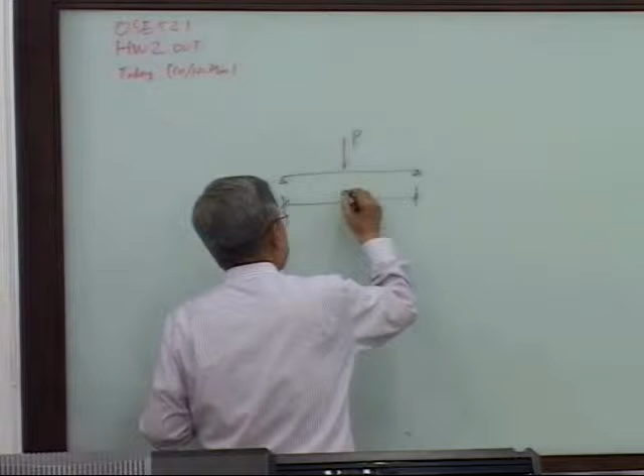This homework problem: this is a simple beam, and you have a loading P. And this is 5 meters. And of course, the maximum bending moment occurs right at the middle. What's the bending moment?

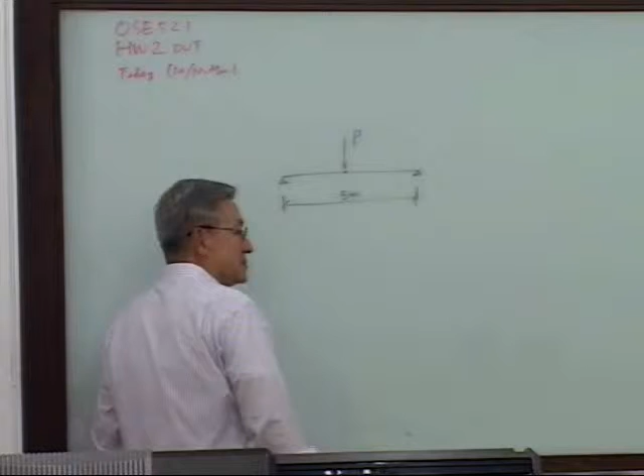Expressed as P, what's the bending moment expressed as P? In the middle — well, let's say this is L. Bending moment, let's say. So over here, the reaction force — this is high school mechanics — is P over 2. The bending moment right here is half of P multiplied by half of L, right? So the critical bending moment is PL over 4.

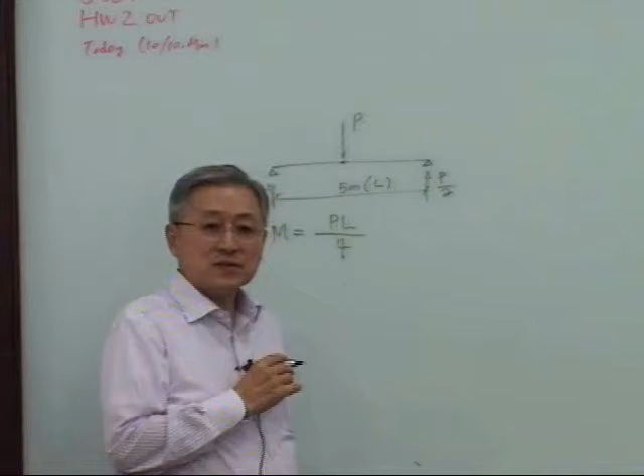I'm going to call this the resistance — doesn't matter, I'm going to call this as resistance. I'm sorry, not resistance. The S. We use R and S, okay?

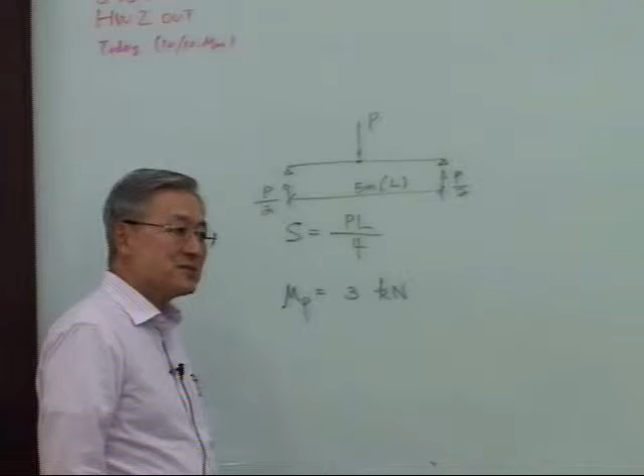Then now, to make a probabilistic model, I have to think about P as a random variable. So as you see in the homework, for the random variable, mu P is equal to 3 kilonewtons. What's mu P? Who cares, Monday morning — mu P is the mean value of the loading, okay? And sigma P is the standard deviation, the spread of the loading. If it's deterministic, it's just one point, one constant. Sigma P squared is equal to 1 kilonewton squared, so this is going to be the variance of the loading.

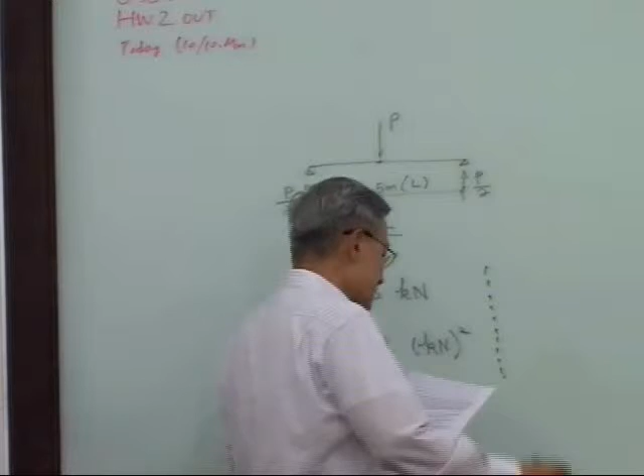And so now I have to give a strength for the beam. So I'm going to say that the mean strength of the beam is 10 kilonewton meters. So this is force times length, that's a moment. So I'm giving it to you as a moment to make it easy — not the full design problem, but a partial design problem — to check out how to handle the actual problem.

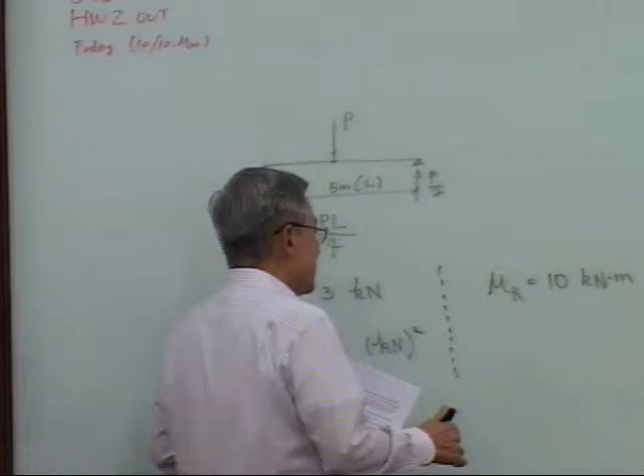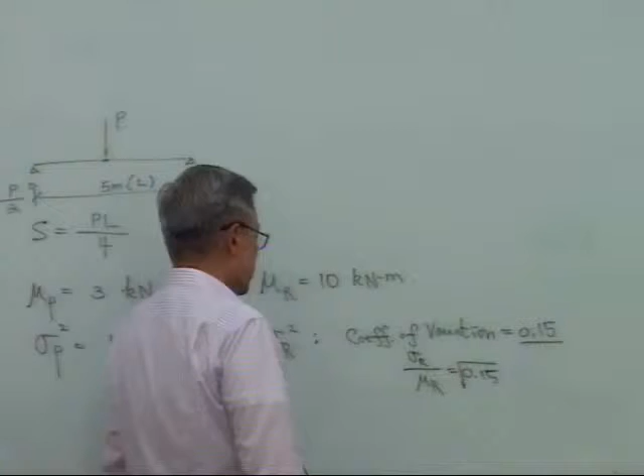Instead, I can give you sigma r squared, but here I'll give a CV, coefficient of variation, equal to 0.15. This is usual input, or from a vendor's sheet, you could have this as part of the spec. Coefficient of variation equals sigma r over mu r, so that's what it is. Then you can compute the sigma r.

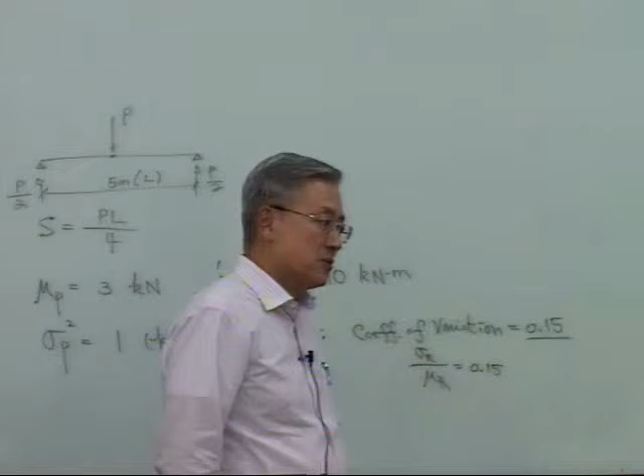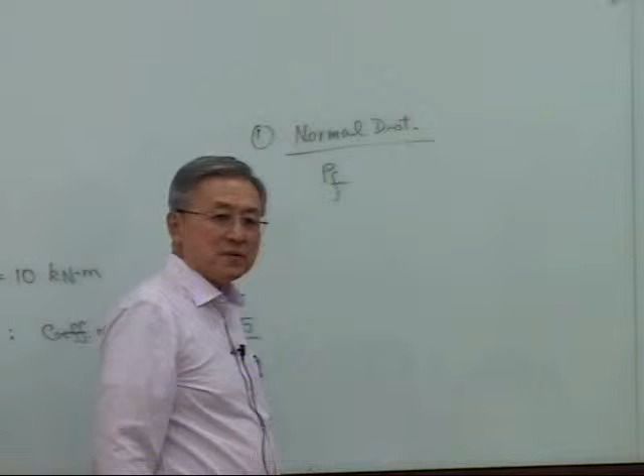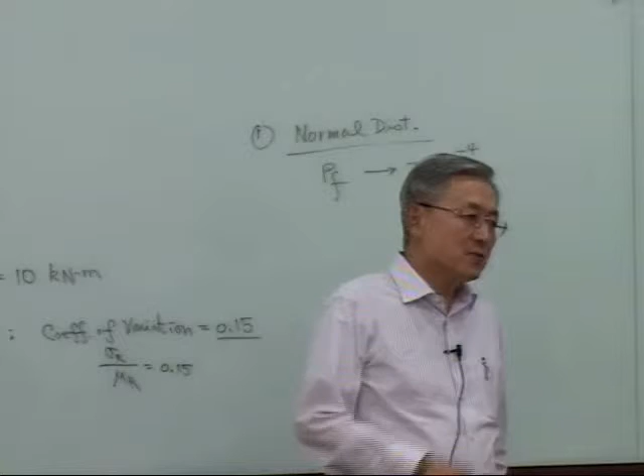Assume normal distribution for loading and the strength, bending strength. First problem, both are normal distribution, very standard. From there, I ask you to compute the PF. The answer is 7 times 10 to the minus 4. Instructor is so generous, because my purpose is not just to see. You will do it 100%, you will compute this correctly. But if at the beginning you write the wrong answer, then you can't proceed to the next step.

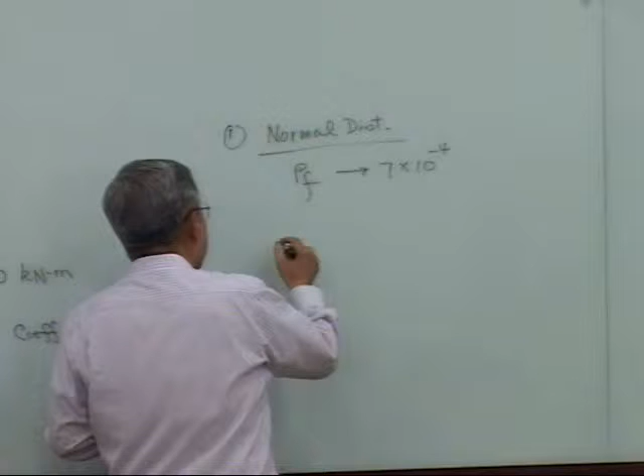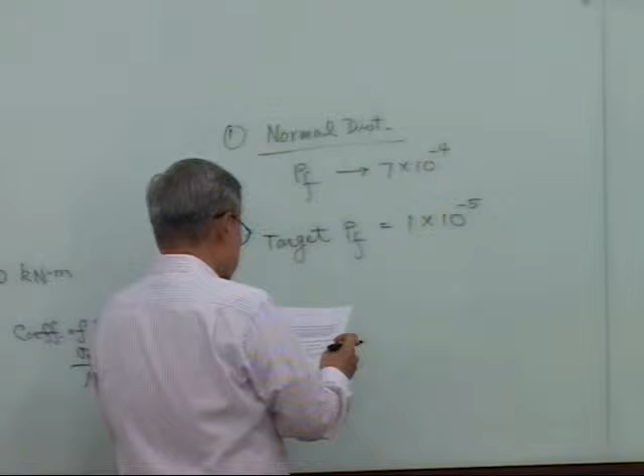So I really want you to prove the probability of failure of the system is 7 times 10 to the minus 4th. Confirm that. Normal distribution, that's what happened for most products. Then the question is, as you compute, you have that, but your target PF, or design PF, is not this, it is 1 times 10 to the minus 5th. Then now, in your position, what are you going to do? How can the simple design be changed so it can meet the target probability of failure? Very simple probabilistic design concept. Clear, right? Question clear?

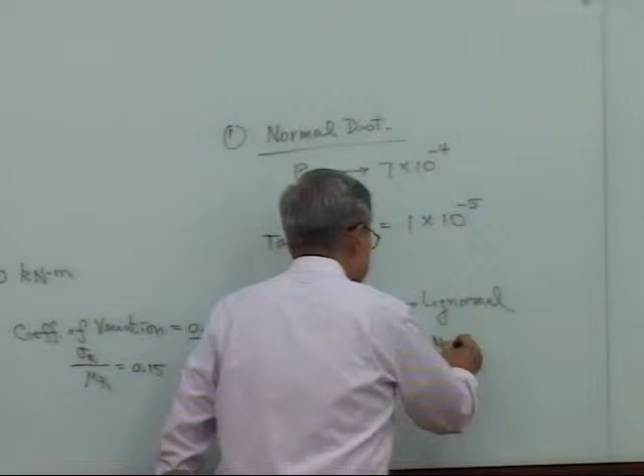Not both. Second problem: loading is concerned with log normal distribution, and resistance, bending strength, is normal. Do we have a question? Loading is log normal, and the strength, bending strength, is a normal distribution. Then what's the PF?

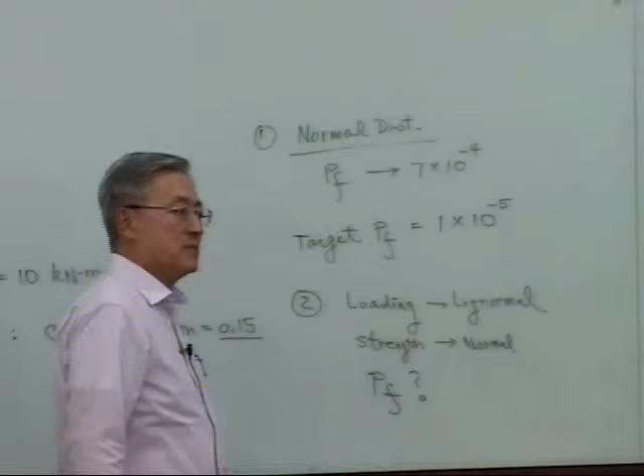Jinggyun, question? We had some question about problem number 1. Okay, go ahead. If we calculate the PF, we can get 7.5 times 10 to the minus 4. You have to confirm. I gave you the value, it could be wrong, but that's what I expect: 7 times 10 to the minus 4th power. So we have to reduce the PF, right? You have to reduce the PF. Then what do you want to do? 10 to the minus 5. Yeah, that's the target probability of failure. Then actually when you compute that, that's 7 times 10 to the minus 4.

Usual criteria is all around there, but I want to make sure the probability of survival is higher. So I can make the target probability of failure 10 to the minus 6 or 7. Then what do you have to do? Starting from today, or possibly Wednesday, I start to inject the safety factor. Then how do you relate the safety factor with the reliability or failure probability? That's the whole idea. This is interesting. I gave some thought last night, then I said, let's do it, okay?

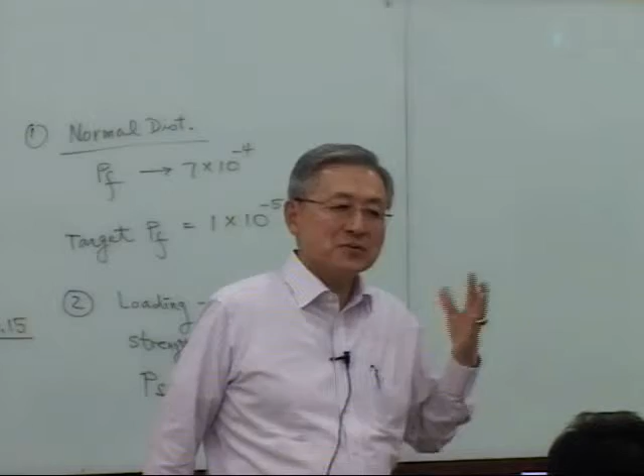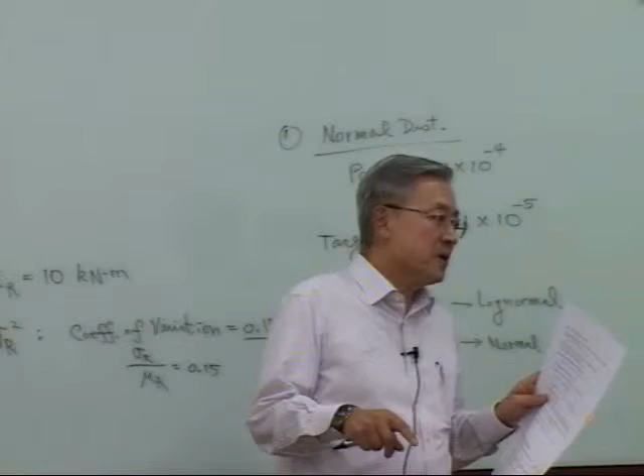Some corrections we're going to make, because last Friday I confused a little bit between the exponential probabilistic model for time to failure and the Weibull model for time to failure. But if you look at your handout, your handout was okay, right? All the notations I used a math type, so-called. Then I'm pretty sure I converted it to a PDF file, and you got the PDF file. So if you look at page 5-2, you will see the Weibull distribution there. If you look at the Weibull distribution, I picked up the best features from a few different books and some papers, and they use different notation, and that's what caused a little bit of confusion on notation.

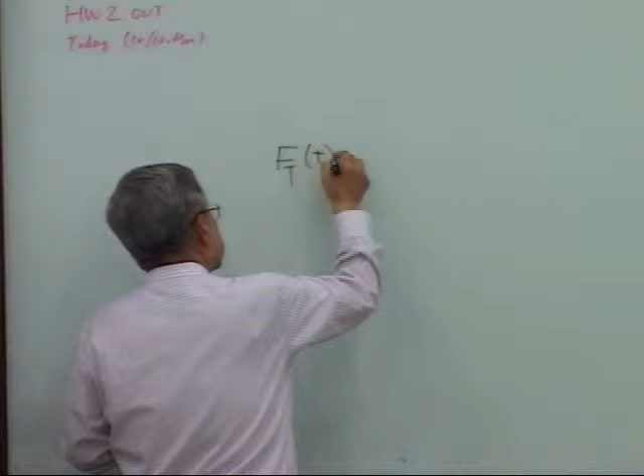If you look at the Weibull distribution, FT in page 2, there is something like this: 1 minus exp of minus t over beta, to the alpha power, and of course t is greater than or equal to 0. That's what you will see there. Two parameters involved, alpha and beta. This is page 2.

And of course, for the reliability is concerned, which is 1 minus F(t). Because this really means this is a probability distribution model or cumulative distribution model. This is equivalent to saying t is less than or equal to t, then reliability is concerned is a complement to this, which is 1 minus f(t).

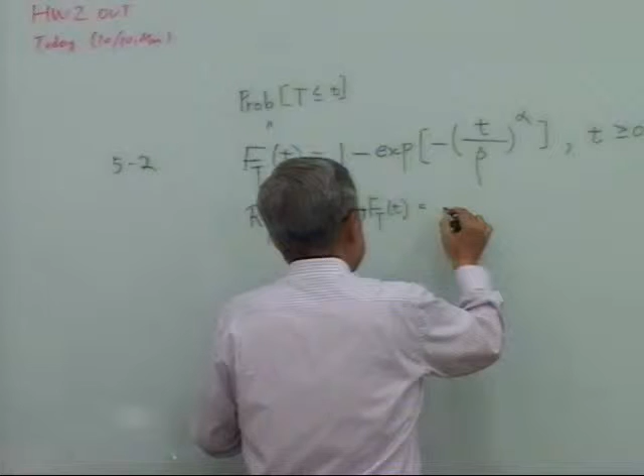So you have reliability model is concerned as minus t over beta, to the alpha. This is what is said exactly there. This is correct. There's nothing wrong on this one.

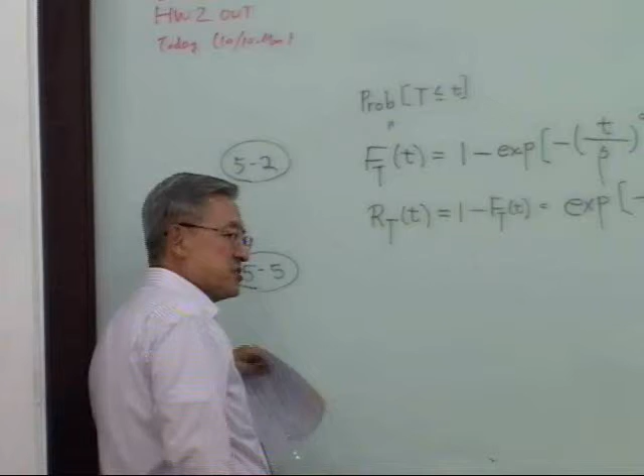This is all correct. But if you look on page 5-5, okay, this is one point of confusion from Friday. Page 5-5, this 5 is really nothing to do with chapter 5, or if this is chapter 1. I just happened to randomly assign this number, so you don't have to worry about it much.

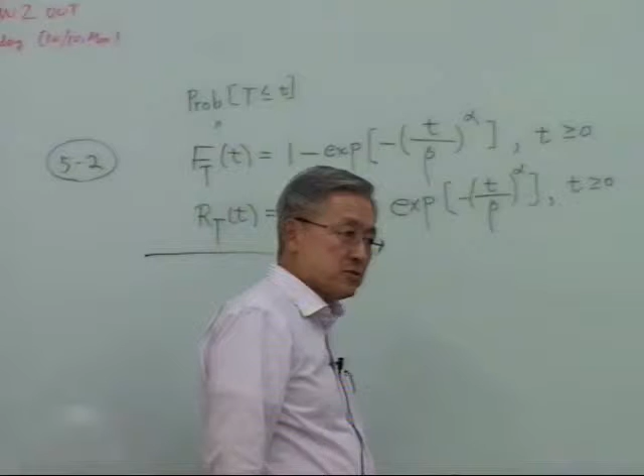And in the exponential model, here, this is Weibull, okay? For the exponential model, what would it be? What do you have to change from the Weibull function to get the exponential function? Alpha is equal to 1. So exponential model is like a special case of the Weibull distribution function. There is no change. In that sense, we can just go ahead to page 5.

So exponential function, or let's say this is Weibull, so I'm going to say Weibull. Same. And f(t) is equal to 1 minus exp of minus t over theta, to the alpha.

And t is this. What's the difference? I used that notation, the beta, there, over here. Here in page 5, I happen to use theta. That's the only difference. So don't confuse.

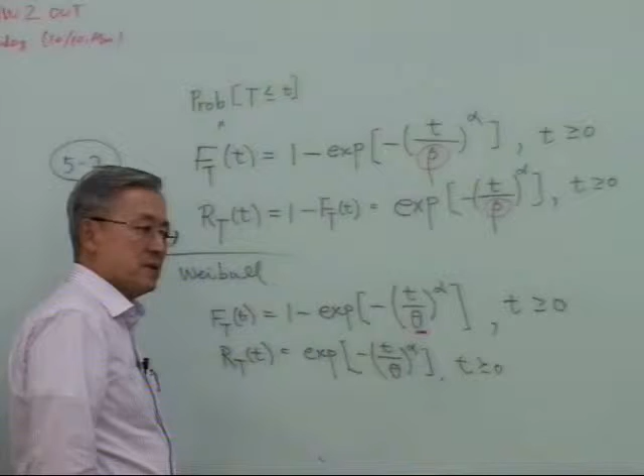Confusion is the worst enemy in the learning process. I feel better not to know it rather than being confused. Okay, that was a correction.

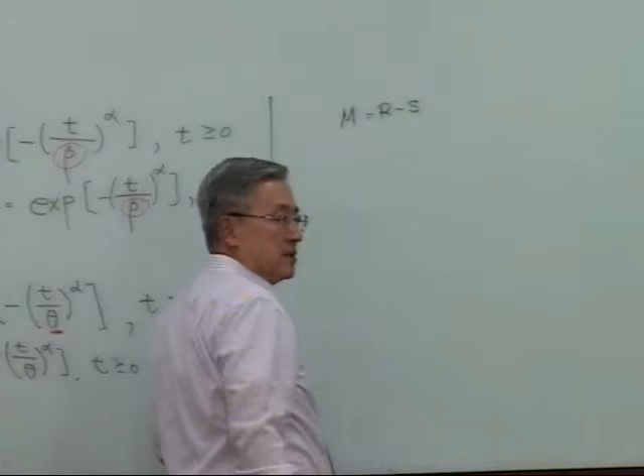And for the normal distribution, for this particular homework problem, to compute the probability of failure, both are normal. Then we defined safety margin as R minus S. R is resistance, generally speaking. S is like the stress or applied stress or applied loading. But when you really solve the problem, the units have to be the same unit for R and S. You can't deal with different units.

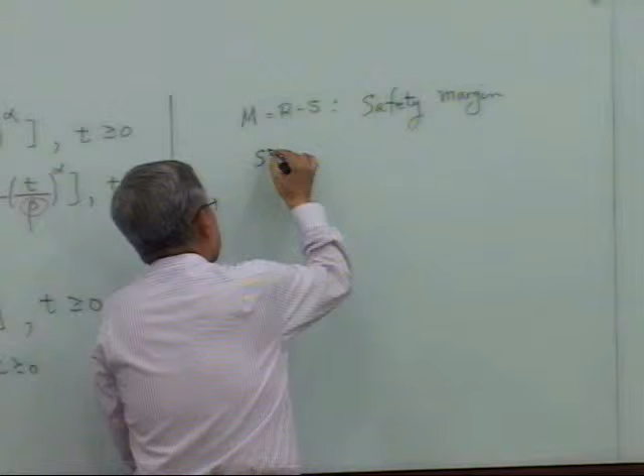So this is the safety margin. That's what we did. And as I slowly introduce the safety concept, safety factor concept, and cast the implication to the reliability of the system or component, what is the safety factor usually? Safety factor, people use N, N1, N2, N3, N, but who cares? Whatever symbol we use, you can sort them out nicely. It's typically R over S, in general, okay? Resistance over the applied. That's the usual definition for safety factor.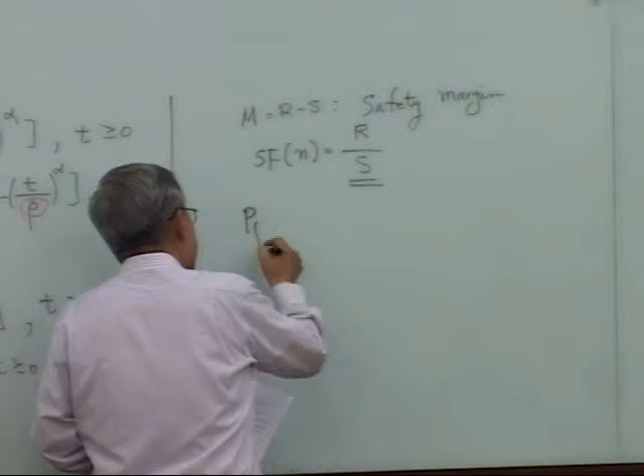And the probability of failure, then you can define probability of failure as probability such that R is less than or equal to S. Both, of course, here are random variables. Then we assumed, last Friday, let's say both are normal distribution.

And you come up with phi of m minus beta. You remember? Who cares? So then what's beta? Beta is called the reliability index. Beta is the reliability index, and this happens to be the inverse of the coefficient of variation. Coefficient of variation, as we indicated here, is a non-dimensional dispersion measure of the probability model. So like sigma over mean. So this is mean over sigma, in general, okay.

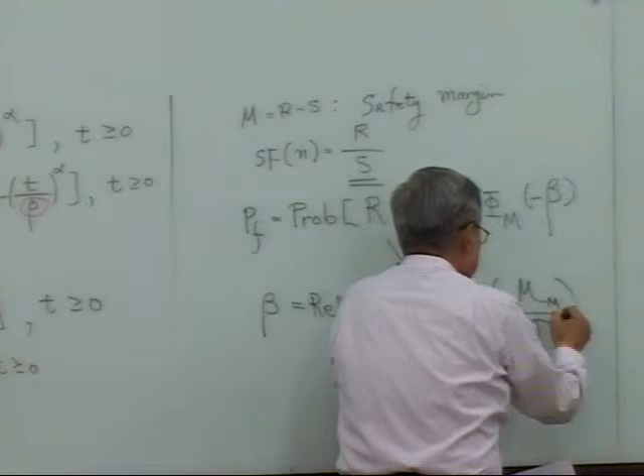In this case, this is the safety margin. So I can say this is that, for the mean of the safety margin. And...

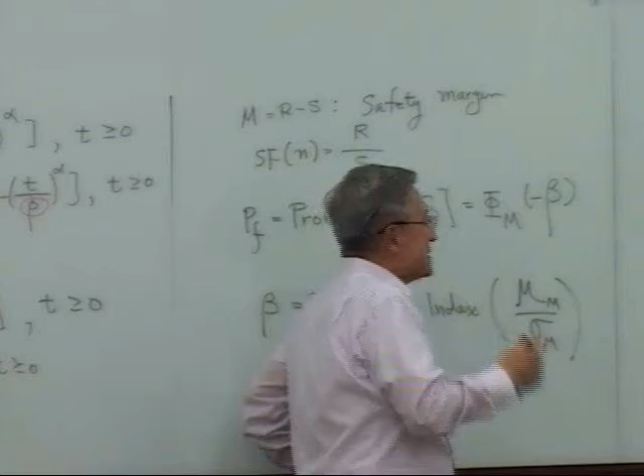You should generalize. The whole idea is to get the probability of failure. I'll write it another 20 or 30 times: PF is equal to, in my notes I just use PROB as a P, that's the same as probability, R minus S. And for the two-dimensional case, when you deal with the simple R random variable and S random variable, that's two-dimensional.

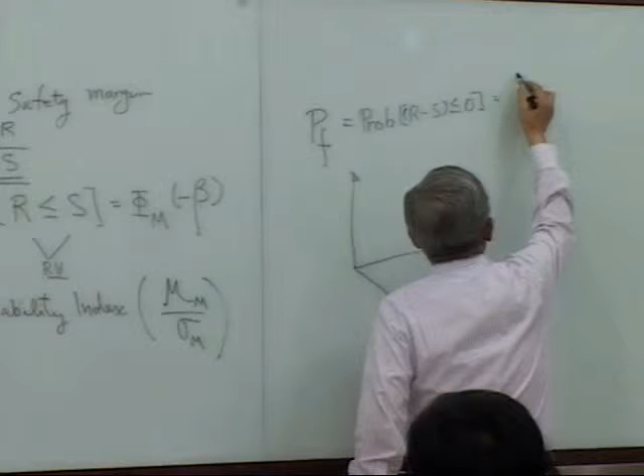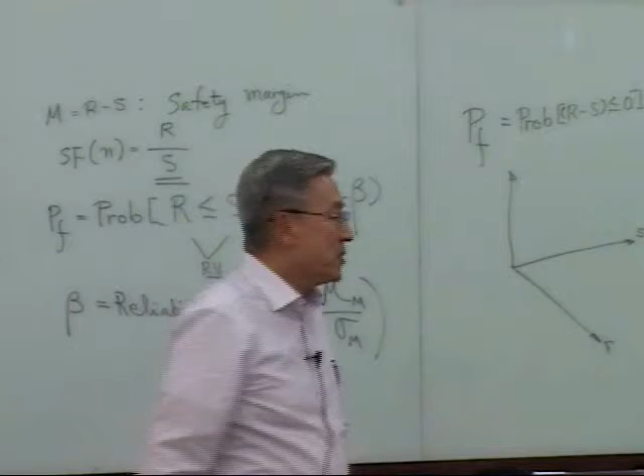Then you can see, if I draw here, I can say this is the R-axis and this is the S-axis, and the probability of failure, this is really nothing but the integration of F(R,S), joint probability, of course, joint probability of two random variables that produce a joint probability function. If it's three, that's a fourth dimension, but here I can say, okay, this is F(R,S), and this is R. I'm going to write it this way, and as I put in the notes, this is a joint... I'll just draw, you know, it makes sense. The volume, I have to draw the volume.

My graphics is so lousy, but I brought some nice graphs here. It's in your notes, something like this. Make sense? I put the FRS, this is a probability density function for R and S.

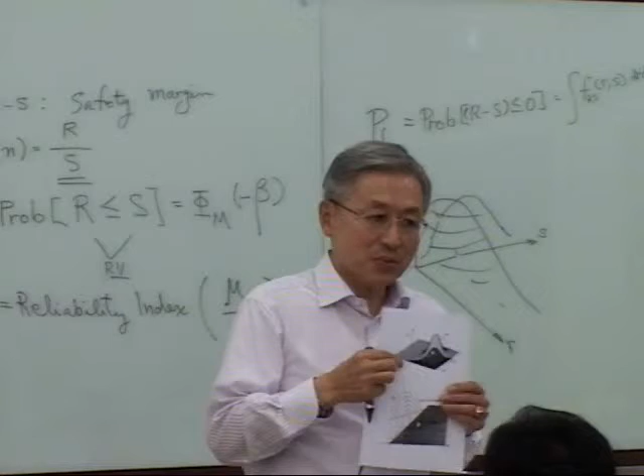The joint probability density function is in your notes. So if you put this, this is R, and this is S. Do you see that there, Arlene? It's in your notes, page 11 or page 10.

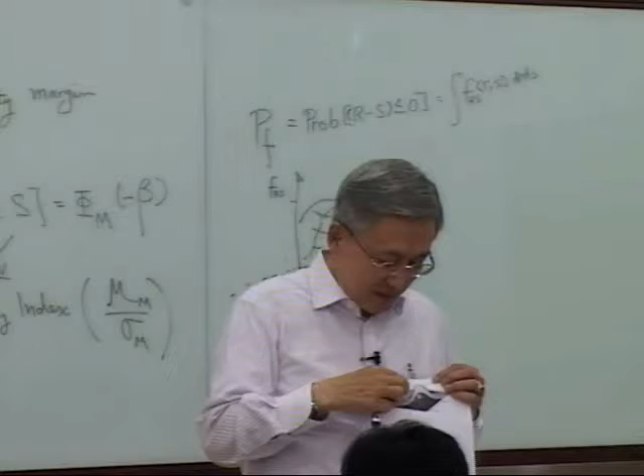How come this goes all the way up just like that? So this is like the plane.

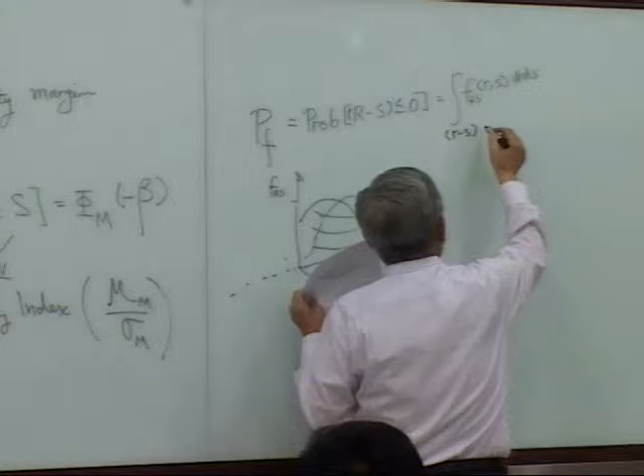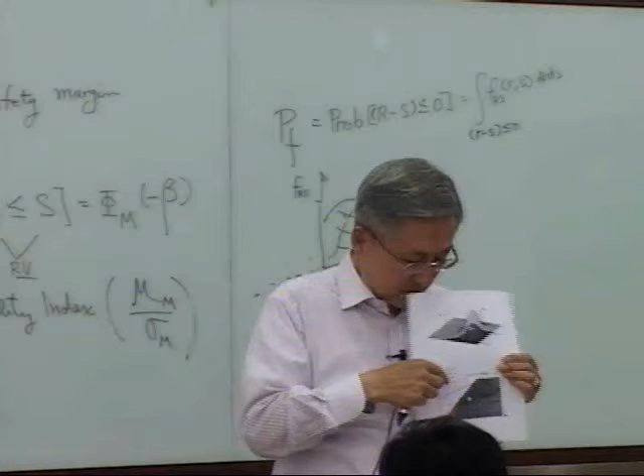R minus S less than or equal to 0 is the domain to compute the probability of failure. Probability of failure is the volume of R, S, and FRS - the density function is a volume, but R minus S less than or equal to 0 is the volume contained in the hatched portion.

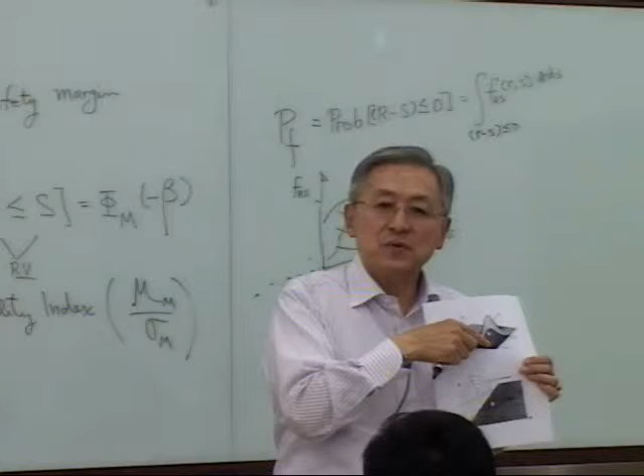The other side is what? The complement of this is reliability rather than probability of failure - probability of survival, that's what reliability is, which is the other volume. Or you can subtract this shaded volume from 1. Usually this shaded volume, the probability of failure, is very small.

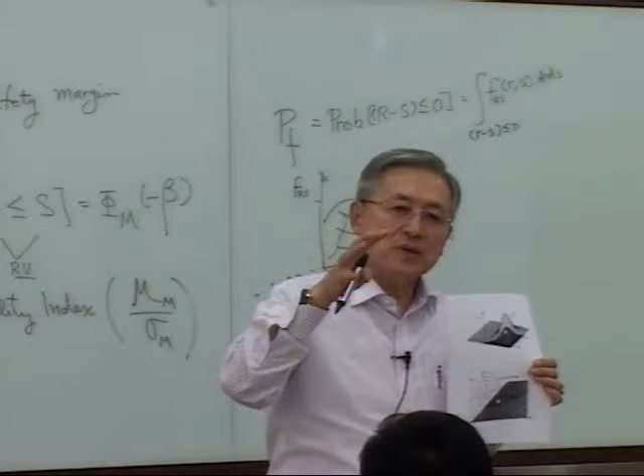So in the computation, sometimes it generates a problem, so you have to look into that. We will deal with that sometime in early November - that's when we'll get into the multidimensional case. You follow here? This is a simple projection right on the RS plane.

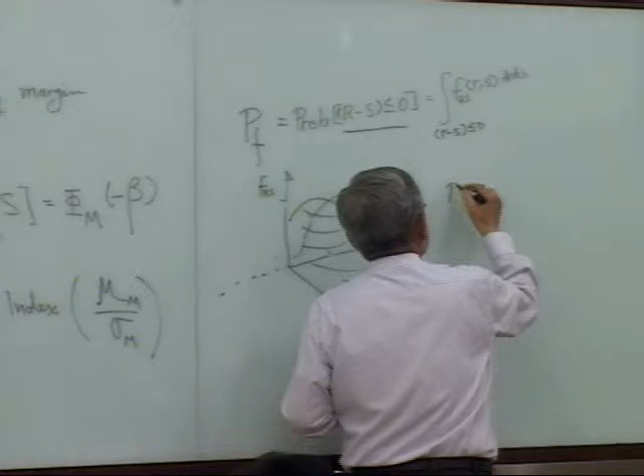Now let's generalize a little bit out of this. R can generally be a collection of random variables, X. X could have a set of more random variables - something like a material property you can treat as a random variable, like Young's modulus. All structure-relevant properties you can put into X, okay?

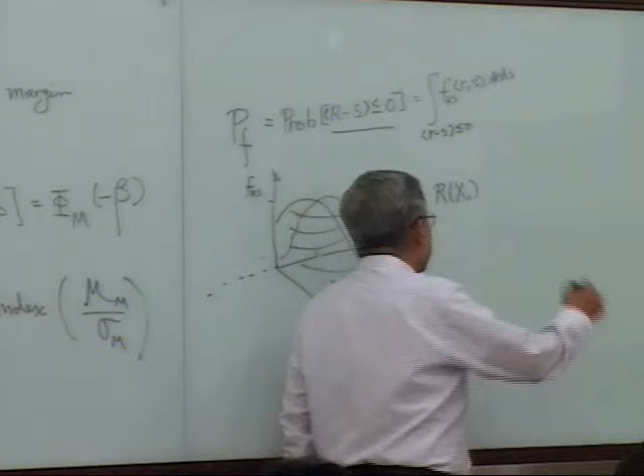And the length is also the same - thickness of the shell you can treat as a random variable. Lots of things you can think of as design parameters - you can say yield stresses or ultimate tensile stresses, you can deal with as a random variable. And S, any random variable related to the loading in the system, you can put into the random variable.

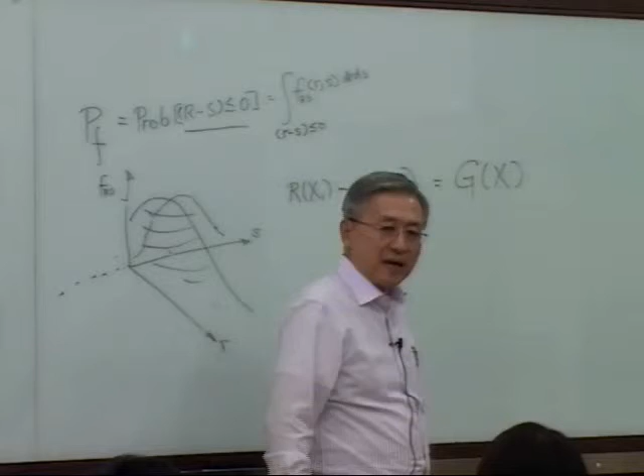In that homework problem, you have only one loading P, but you can have multiple loadings - you can have pressure, which you can treat as a random variable. So in general, I can deal with a general function G as a collection of random variables, let's say X. Here, G is called the limit state function.

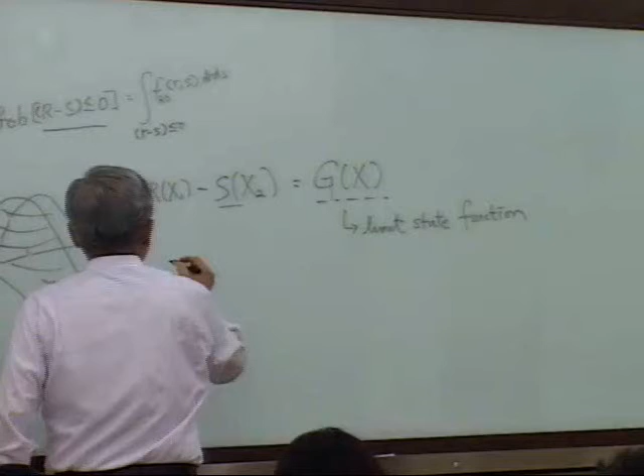So I can rewrite this in general: PF is equal to the probability that G of X is less than or equal to 0, to generalize it.

As far as the integration form is concerned, F, and this is really the collection of random variables X - which is X1, X2, all the way through Xn. Then here is dx1 all the way through dxn, where the domain is G of X less than or equal to 0.

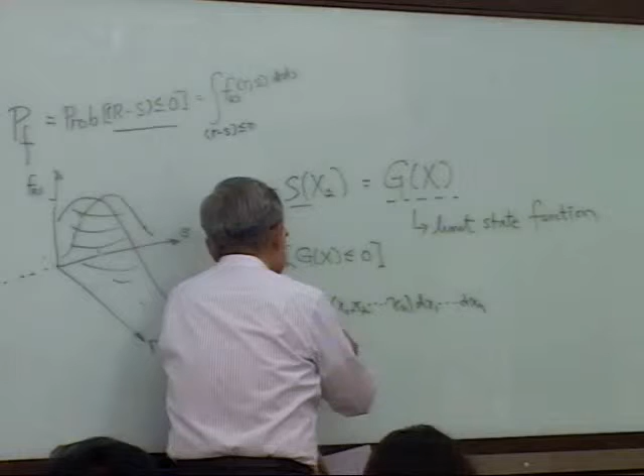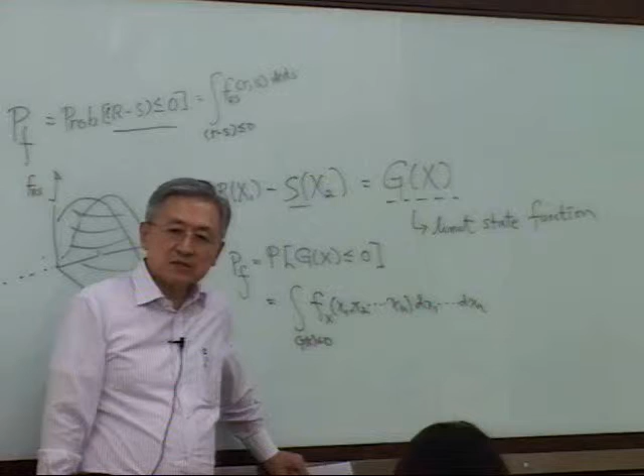This is awfully difficult to solve. The easiest tool, which some of you may have knowledge on - structure optimization - is to optimize it by assigning the objective function, then all the side constraints, and solve that integration.

But the thought was, you are all working on structure reliability, then suddenly you have to go study structure optimization, then come back - which is not quite desirable. That's what the first order reliability method is for, which directly involves solving this equation.

That's the direction I'm going. In the Choi textbook, I really like it for about 1/3 from the beginning - it has merit there, and examples are set up nicely. But suddenly going into the optimization, you get lost, because lots of terminologies are new, picked out from optimization techniques.

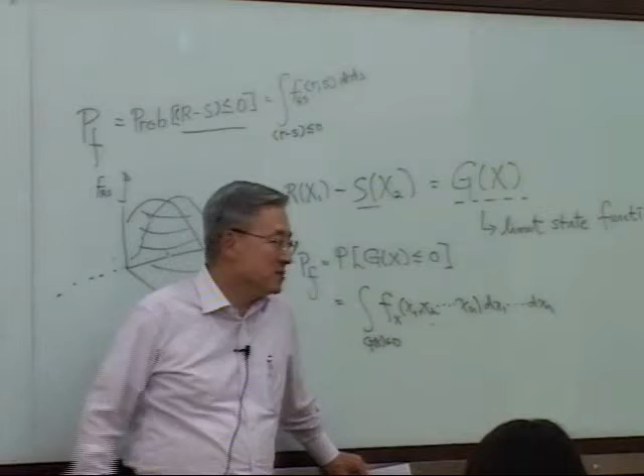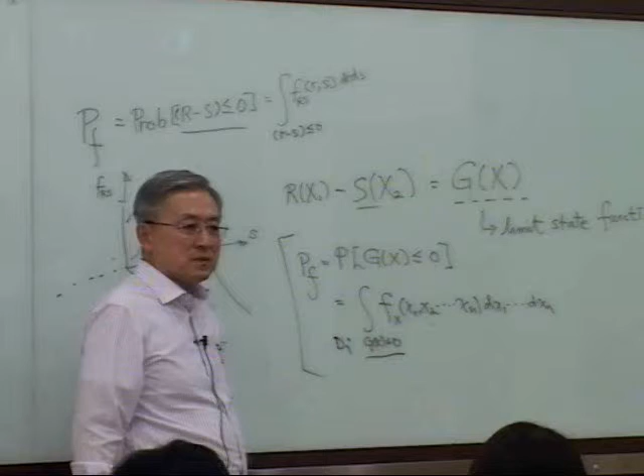So anyway, this is a very general expression. This is what the failure domain is - some people use D for it, but it's all the same thing, less than or equal. And the limit state G - if G of X, continuing this, is less than or equal to 0, this is the state of failure.

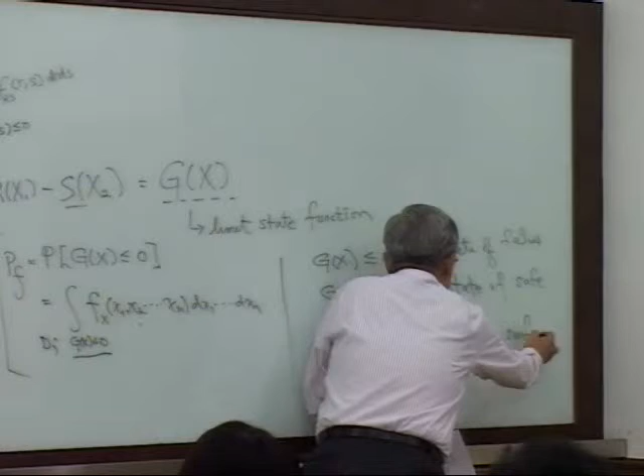If G is greater than 0, that is a state of safe. Another region is where G(X) is equal to 0, which is the failure surface. So what that means is really the failure surface, as you have in your notes. This is the state of failure, shaded. The cut, which is really the generated surface, is just a cut, that's the failure surface. All the other portion, all white here, is the state of safe.

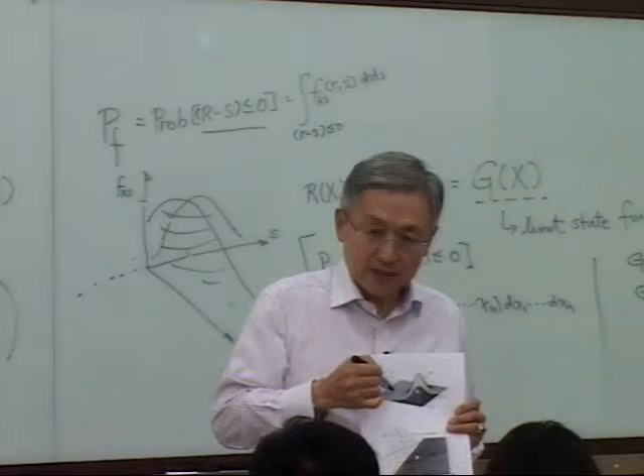As reliability is concerned, we look at the volume of the white area. The shaded and unshaded, if you add the two together, that's the total volume of the probability density function, which has to be equal to 1.

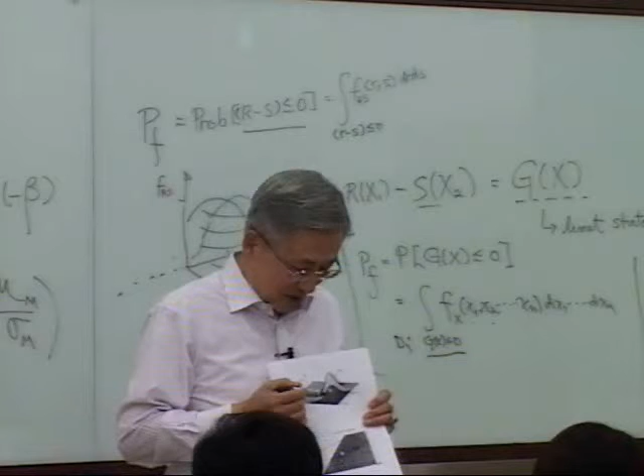So the probability of failure I assigned as homework, I said PF is 7 times 10 to the minus 4, small. That's why this area, the volume, has to be very small.

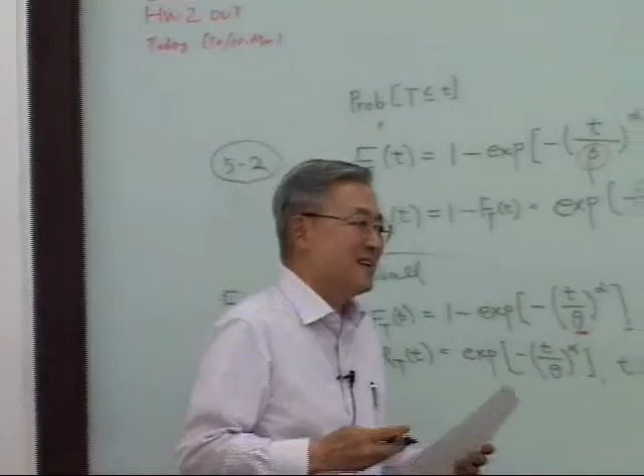I feel more comfortable today than Friday, because when I start to screw up, I'll screw up forever. Is it clear? Should be clear. Then I ask a question to answer myself. Clear? Clear. Okay.

So now a special case out of this: everything here is assumed, all the random variables can be correlated. But life is concerned, of course it's correlated to some degree, but usually in lots of cases it's independent of each other. If all the random variables are statistically independent of each other, then everything becomes simple.

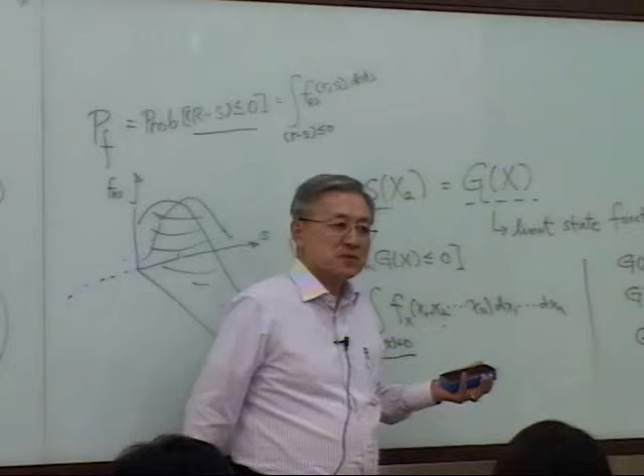As an example, I always use human relations. To make a decision when you're a bachelor alone, it's simple. If I want to go this Saturday, I want to take a trip myself to Tongyeong, all I have to do is get up in the morning, eat, and take off.

But when you're married, it's different. When you get up in the morning, you can't just go, you have to ask your wife or husband, make sure they agree. But when you have children, what happens? The situation is a lot harder. The wife says, okay, let's go, it'll be fun. But the children say, no, mom, I want to go to Seoul Daegongwon, the amusement park. Then you have to scrap going to Tongyeong, you have to follow your children. So it is all constrained.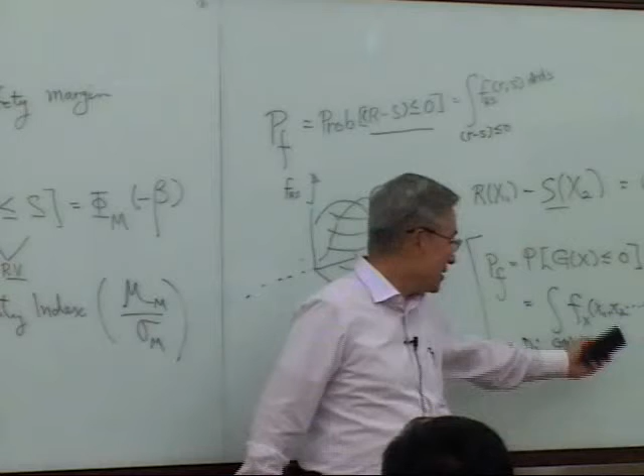So this situation is the bachelor state, right? If in this case it's with many children, that's for the correlated situation. But for the uncorrelated situation, when I say uncorrelated, that's the same as independent.

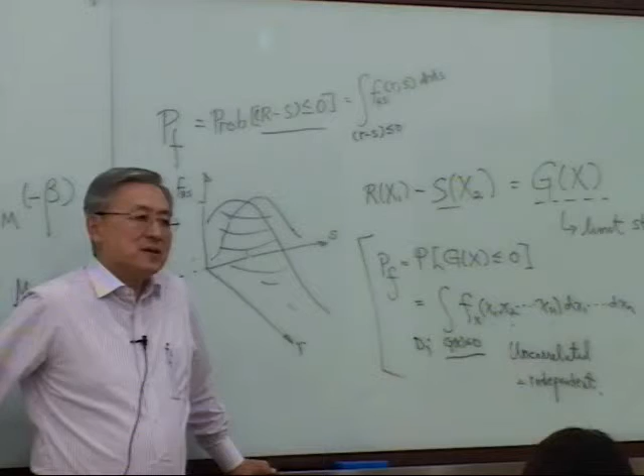When I teach random vibration next spring, that's really probabilistic design, that's dynamics. We use 'uncorrelated' more than 'independent', but it's all statistically uncorrelated. That's what that means here. Everything is all individual.

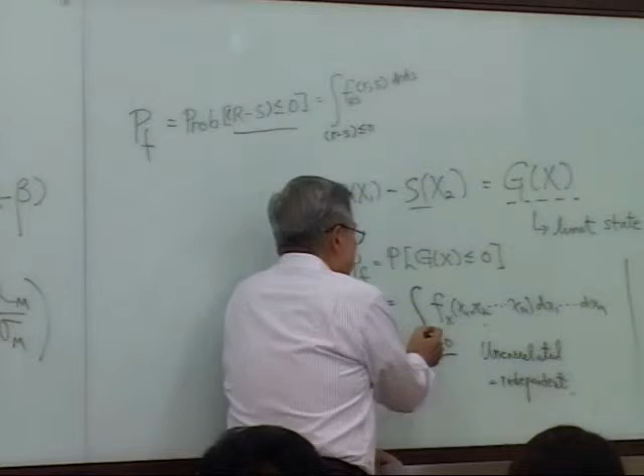So if I rewrite this, I just use one integral, but really it's multiple integration. I can write this if independent, you know what I mean, for the independent situation. PF can be written as multiple integration from x1 domain all the way through xn domain, of fx1 dx1 times fx2, and so on. You can split everything as independent, like the bachelor case, then multiply them together. Much easier.

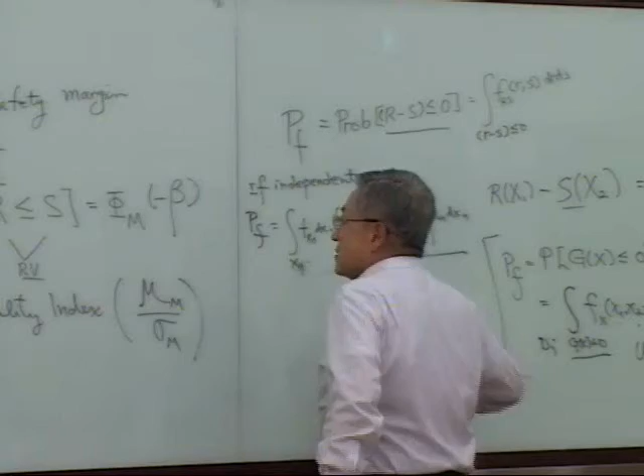Then in class we are dealing with R and S, which you can put in 3D space with the probability density function.

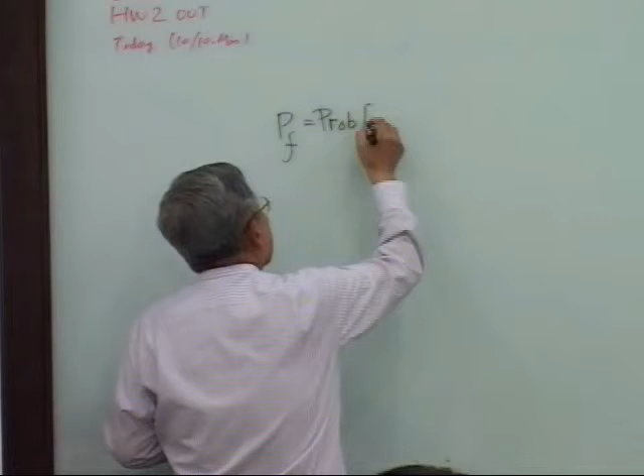Then I can write this as the integration over the region R minus S less than or equal to 0, of f(r,s) dr ds. This is, one more time, to capture the essence of the probability of failure expression.

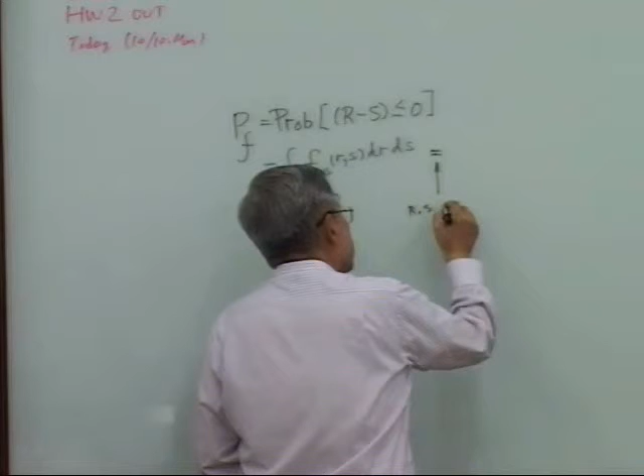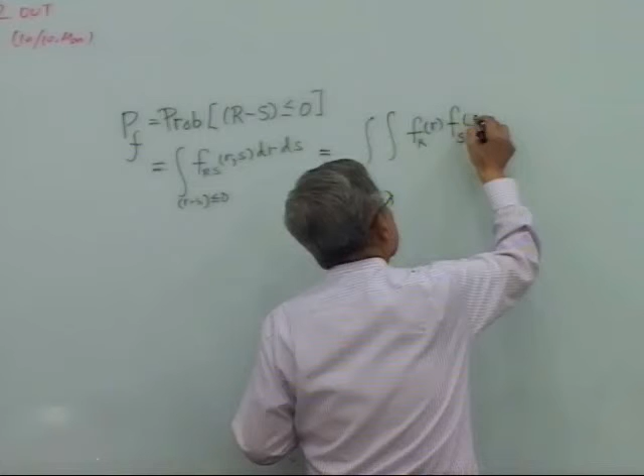For the independent situation, I'll say the assumption here is R and S are independent. Then I can write this independent case, R and S, as a multiplication. This is from minus infinity to infinity.

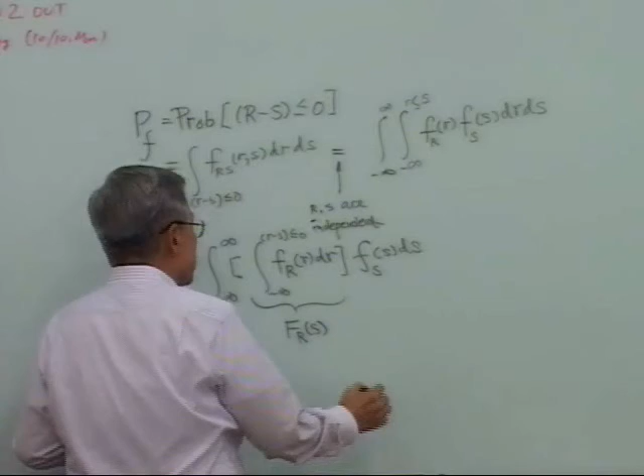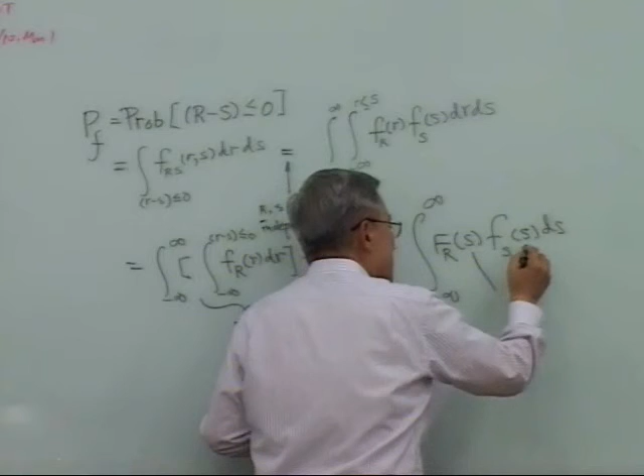And this I can write as the domain where R is less than or equal to S. Then I can associate that expression as minus infinity to infinity, first integration, R minus S less than equal to 0, f_R dr, then f_s(s) ds. This expression is F_R(s). Then the whole thing turns into minus infinity to infinity of F_R(s), and S just carries over as the integration parameter, ds. Usually you write it as minus infinity to infinity of F_R(x), f_s(x) dx.

This is only good when the random variables are independent of each other, for all the random variables being independent.

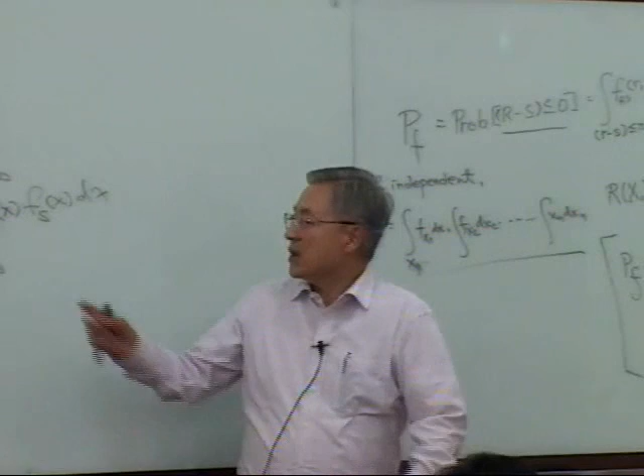So this, I felt, was the simplest way to derive this expression, but if you look at my notes, I use event A, event B, then probability of A and B, taking an intersection, which is a slightly different way to get the same conclusion.